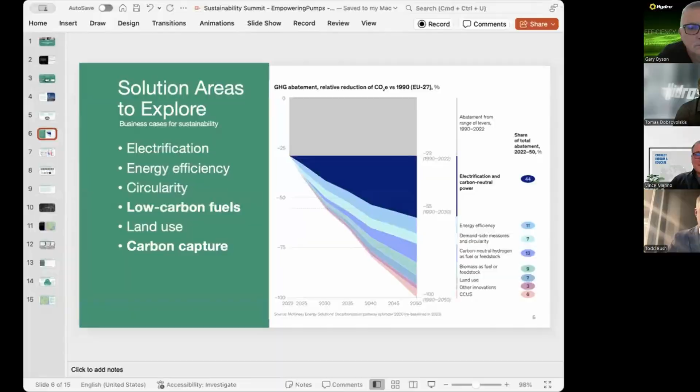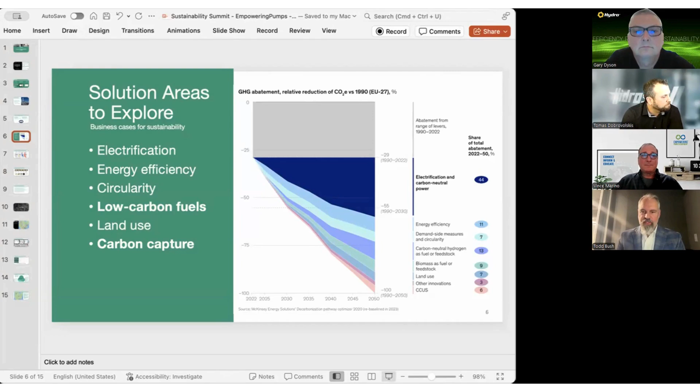Yeah, no, that's perfect. Let me see if I can share my screen. Obviously, I'm focused on a lot of the low carbon fuels, low carbon products. Hopefully, if you can see this pretty well.

I like pointing back to, because the industrial decarbonization topic is so big, and you start getting into sustainability drivers and trying to understand where you're going to actually, where as a company you're going to focus. Obviously, if you're building compressors, building pumps for energy efficient industrial processes, that's great, you're already in line with kind of the scope 1, scope 2, scope 3 type of emissions projects that are going on at a lot of corporations.

But I like pointing people back to the McKinsey study, this global energy decarbonization pathway, where they're looking at, in this particular chart, some of the EU data, and how there's been an effort to focus on electrification, focus on energy efficiency, to reduce basically CO2 and CO2 equivalent for a number of years. And then this basically takes that forward to 2050 to see what possible solutions could be explored for many industrial use cases.

So we've already been talking about a handful of them, right? Electrification, circularity. I'll mention low carbon fuels, even lower footprints for operations, such that you're using less land and you have a more modular approach to maybe constructing a facility, or even more modular approach to different pieces of equipment. And then lastly, kind of carbon capture.

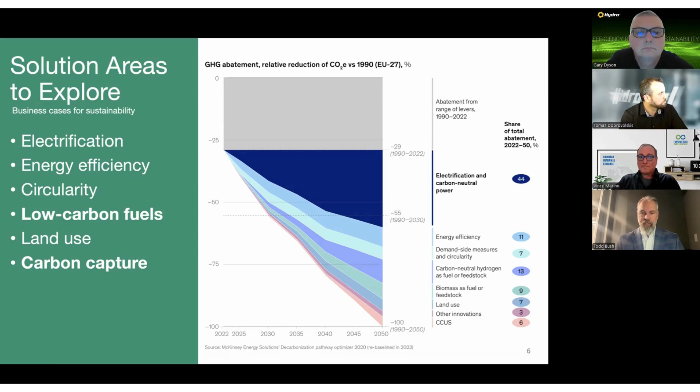I tend to focus a lot of my time on the low carbon fuel side, as well as carbon capture. And as you start looking at these other industry segments, whether you're thinking about ammonia or ethanol or hydrogen or even natural gas in this case, the cost of CO2 capture, I'd say, varies pretty widely depending on the total volumes of CO2 that are out there, and the individual facilities and what they're producing.

This chart gives you a view of each segment, and each dot represents a facility. The line going across is the Inflation Reduction Act, $85 a ton, where for capturing CO2 and sequestering it, you get $85. For capturing CO2 and utilizing it, you'd get basically $60 a ton.

I'm using $85 a ton here to illustrate that many facilities, whether a blue ammonia product that comes to market, or a low carbon ethanol kind of gasoline additive, both of those are well under that $85 a ton.

Then as you get into hydrogen facilities and natural gas emitters, all of these are facilities in North America. There are a number of hydrogen and natural gas emitters that are above the $85 a ton, implying those are outside of the money and would be difficult projects to do.

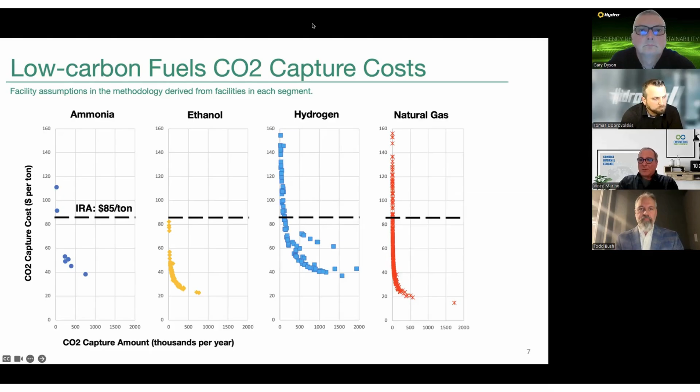Let me ask you a quick question. Hydro Inc., if memory serves, has hydrogen pumps, pumps for hydrogen. Am I right?

Not particularly pumps for hydrogen. What we have is technology in general for pumping any sort of equipment, but we focus on the aftermarket and the service side.

So we're very much into making equipment that is really niche and unique to do what it actually needs to do. It's bespoke product really, not product that you can just buy from a range of pumps. We will tailor a pump specifically to the exact needs of the customer.

And we will change equipment that you've already bought. We will change its mechanical and hydraulic design so it does what it should do, not what you originally bought it to do. We offer that unique service across many industrial processes, oil and gas, hydrogen, all sorts of processes.

I think we're on the sort of opposite end of Todd's discussion really, because Todd's saying, okay, we can sequester the CO2, we can capture the CO2. We're on the end of, don't put the CO2 in the atmosphere. Let's reduce how much CO2 you are actually creating by making machines that are not too big, do what they're supposed to do, and don't consume the power in the way that they have been doing. So, if you'd like, I can give you a couple of specific examples.

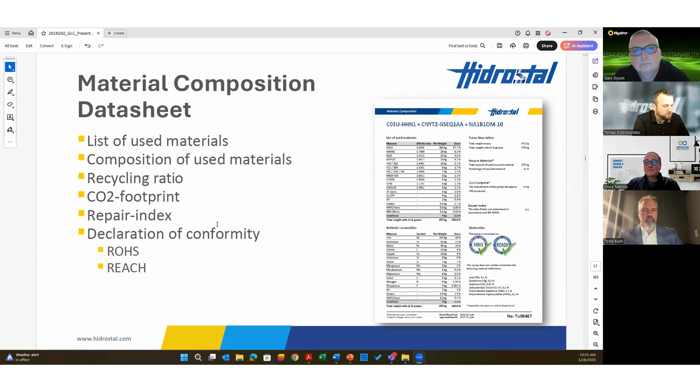These are some of the programs that Europe has initiated and started, and I think it's coming to the United States because a lot of the manufacturers are from Europe. RoHS is restriction of hazardous substances. REACH is looking at restriction of chemicals, and Europe has a good start on this.

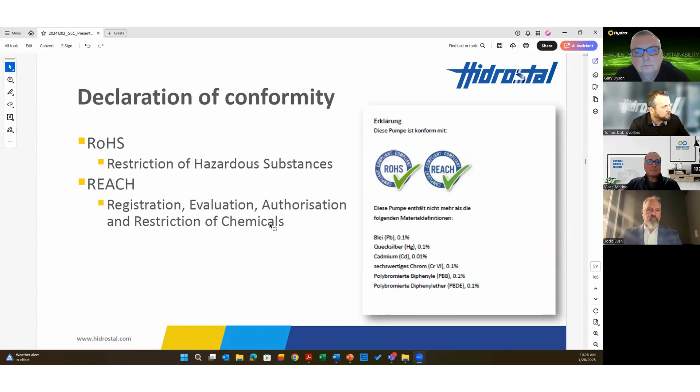And here we're just kind of looking at it—then there's the repair index, how repairable is this. Especially what Gary's doing with Hydro Inc. here in the States and all over the world is making sure this equipment is repairable. Because if it is, and if it's made out of metals, then it becomes almost 100% recyclable and repairable. And that's what you're looking for in sustainability in a product.

This industry, wastewater, is about sustainability and circular economy, because you're taking water that's dirty and reusing it. So you put in a product on top of that, and you're getting multiplication factors of energy efficiency and sustainability.

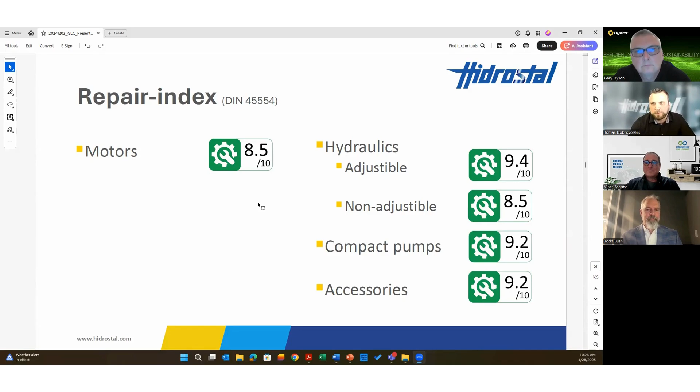That actually was one of the things I was trying to wrap my mind around with this whole sustainability concept, because it's multifaceted. It can be with the individual—I've switched from water bottles to glass. It could be packaging of your end product. It could literally be that we've changed to reusable containers to ship a pump, as opposed to plastics that get thrown out and go into the landfill. There's all kinds of ways this sustainability concept has tendrils that are just all over.

That's why it's a little bit intimidating for me, because I'm really asking you guys to share where we are, what can we do, and how we can all improve together to be a little bit more sustainable, with the understanding that the intention is so we can either leave the world a better place for our kids when we're gone, or just continue the circularity of recycling and utilization, kind of like the old farm example I gave with the chickens and the tomato plants.

I mean, where are we, and can we get any better? Todd, you got any feedback on that? Or I'm kind of bouncing around here, but I think all of you guys got some slides to share. Gary, you got anything? Okay.

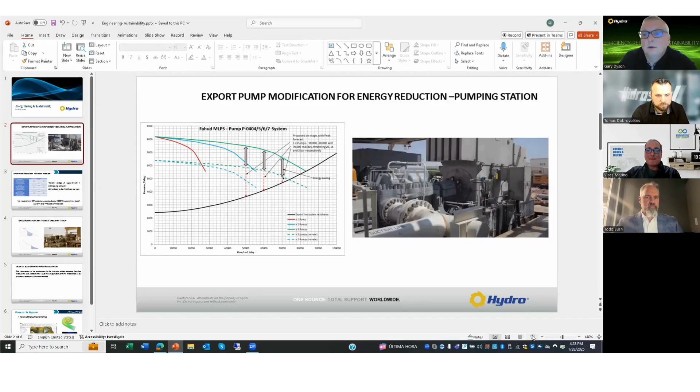This is a high energy pump in Oman, one of the pumping stations that exports oil out of Oman. At the top you've got this green curve - these are three pumps running in parallel, which is what the pump was bought to do maybe 20 years ago. The dotted green line is what's required of it. This is a typical situation that happens in hundreds of thousands of pumping stations around the world. People never change the pumps; they stay with it and just throttle this head away.

So you spend all those kilowatts generating pressure at a certain flow, and then you break all that pressure down across the control valve. All that power you've used is not doing meaningful work - it's work you're just casting aside, and the pressure's broken down.

We've worked hand in hand with this oil company to effectively change their equipment in the field. They could have gone to a new equipment manufacturer and said, okay, we want new equipment to do this. But what they allowed us to do was hydraulically modify their equipment so within the same footprint, within the same pump, it does what it needs to do - not what it was bought to do.

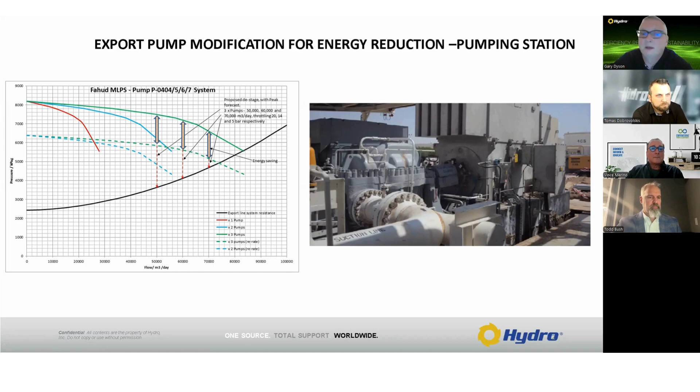In this particular instance, this is about 3,500 tons per year of CO2 saved. You can see it's equivalent to 168,500 trees you'd have to plant, or 770 cars off the street. But the great thing for these guys is it paid for itself - a million US dollars annually saved by not using those kilowatts.

I think there's a message in this because we need to look at things end to end. The reason this has never been done before is the oil company didn't consider the cost of power, because that was another state utility and they didn't pay for power. So a state-owned oil company generating oil didn't pay for power from the state-owned generating facilities. Power was effectively free to them, but it's not free to the environment - the environment feels the consequence of that power you're generating and the way you're generating it.

So again, not using the kilowatts is the right way - not putting the CO2 out there and reducing how much power we have to create. I think it's the starting point for our mission of sustainability. We need to reduce first - that's the starting point, and then the reuse and recycle comes beyond that. But our first mission should be to reduce the number of kilowatts.

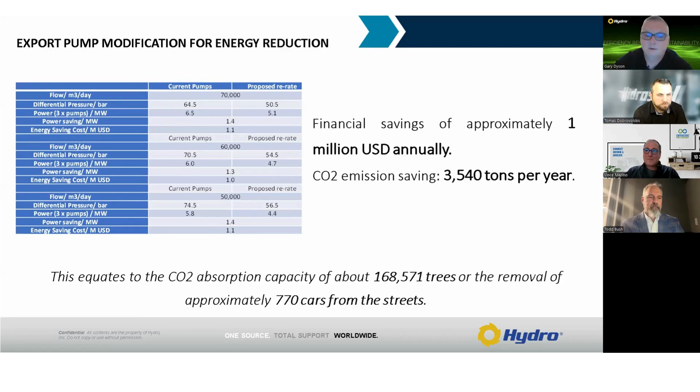And if those pumps are big pumps, if those are a megawatt pump, then just saving 10% of that consumed power can be an enormous benefit to everybody. So I just thought I'd share that with you.

Fascinating. Thank you, Gary. And maybe Vince, I'll just jump in real quick because... Please.

I think Gary hit on a couple really good points on the life cycle side, and we're starting to see more of that life cycle analysis come into play from both the power perspective as well as individual products, equipment, and facilities. Take, for example, power companies looking at different generation techniques. They're obviously thinking about renewables and evaluating renewables, also evaluating what happens if they could capture the CO2 off of something like a combined cycle plant, and what they could then do with those emissions if they're able to capture them and reuse them.

Things like generating power, but capturing the CO2 and reusing it for synthetic gasoline. There's very interesting technology out there coming into play where you have lower carbon products. Basically, if you think of it in terms of life cycle analysis or carbon intensity—sometimes those terms are used interchangeably—you start thinking of all the CO2 reuse opportunities where you create synthetic products from CO2 to reuse in our existing infrastructure.

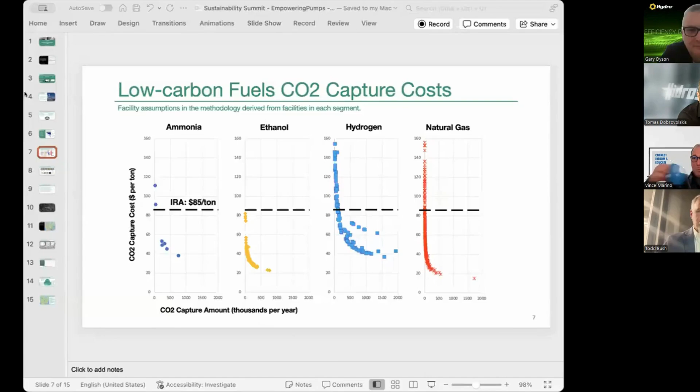I'm happy to show a little bit of the presentation. Let me go back to that same slide and share it. Let me make sure I'm on the correct one. Hopefully you can see the slide. So DecarbonFuse, as mentioned earlier, is a low carbon advisory and intelligence company. We work with power companies, oil and gas, generally asset owners—that could be ethanol producers, ammonia producers as well, along with any of those investors. We started essentially about 5 years ago looking at

emissions-based intensity for oil and gas, various oil and gas equipment. A lot of that revolved around hydraulic horsepower and looking at how companies were making a change to electrified pumps and electrified fleets. Sharing an anecdote here—probably when we started out of, call it maybe 200, 290, 300 frac fleets that were active in oil and gas, there were probably 3% that were essentially e-fleets, with complete electrification in the field. As that moved from 2020 till now, you're probably looking at about 40 to 50% of those fleets that are electrified.

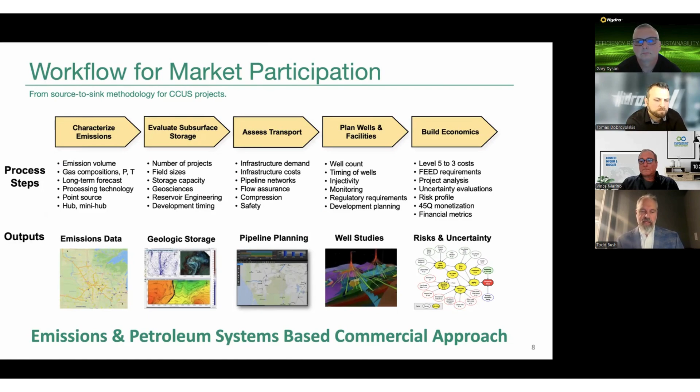So those are all considerations you have to take as you start thinking about either reducing the emissions or reusing them in some way. I just like using that as an example of how you go through that entire process from a market participation side, as well as thinking about what else you can do with those emission reductions and how that translates to new products, or even winning new business because you are taking into account the entire life cycle approach.

The beauty of this is everything you just pointed to, pumps are associated with - virtually everything, I mean, from water to gases to liquefied gas, all of that, it's fascinating.

You mentioned CO2 into alternative energy. Is that right? Did I hear that correctly?

Yeah, so really kind of synthetic products. So CO2 - some companies taking CO2 and creating other synthetic products like synthetic gasoline, or even CO2 to propylene, which is another chemical that's used often in the chemical industry and as an input to other products.

So you start thinking about how to reduce the reliance on petroleum-based products and use CO2-based products instead. It becomes a whole web of product replacement that's possible, but right now we're still at the early stages of it.

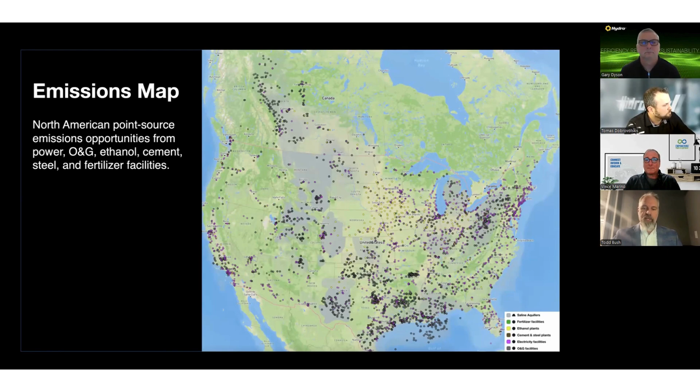Essentially, we'll end up taking all of the emission sources across North America, looking at those from an industry perspective, seeing where you could utilize those, where some kind of buyers might be from the CO2 standpoint, and then from a sequestration side, where the CO2 pipelines are, as well as any storage facility. So we like taking that broad view from the emission standpoint to understand what else you can do with the CO2, and work with a lot of different companies around carbon capture.

From the capture standpoint, there's a lot of CO2 technology companies that we've worked with that really dig deep on what type of amines are best for different CO2 sources. Then getting into the transport side, typically those are more midstream pipeline companies getting into CO2, but we have done a handful of rail and trucking for CO2.

And then from a utilization standpoint, there's many different companies that are taking CO2 and putting it into products. So maybe that's CO2 to sustainable aviation fuel, or CO2 to cement, or CO2 to some type of chemical.

And then the other piece is the storage side, where you have a lot of either former oil and gas companies or project developers that are looking at sequestration.

And then the companies that are supporting all across, whether that's the EPCs that were brought up, tackling the build out for the CO2 facilities or midstream facilities, and then other services that are required, whether those are compressors, equipment, pumps, steel, even now getting into chrome steel for some of the sequestration side. So a lot of interesting connections to different industries and different companies.